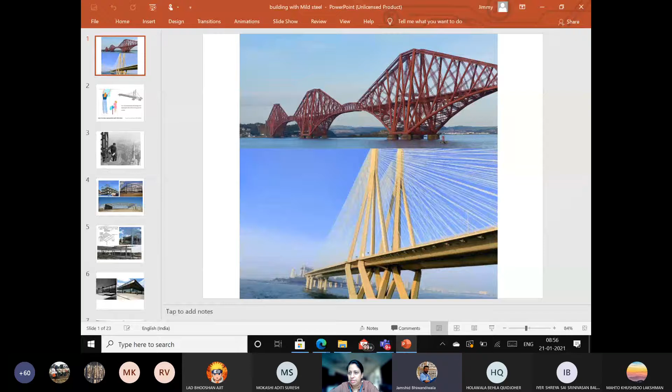Okay. So today what we're going to talk about is how, when we work with steel, we can't just deal with it like any other material. Most of the time, we think of steel as any other material like timber or concrete. We could make some of the biggest mistakes by saying that instead of concrete we could build in steel, but its implications can be very drastic. So my presentation today is on how to design appropriately with mild steel.

I'm going to start the class with these two images. The first is the Firth of Forth Bridge, and the other is our well-known Worli Sea Link. Since I don't have much time, I won't ask you what's the difference. I'll say directly that the first one uses an extensive amount of steel because it uses cross-sectional members, or rolled steel, to make girders. The system in which this bridge is made is known as the Gerber beam system. It uses a lot of steel to make various kinds of strutting girders to span these distances.

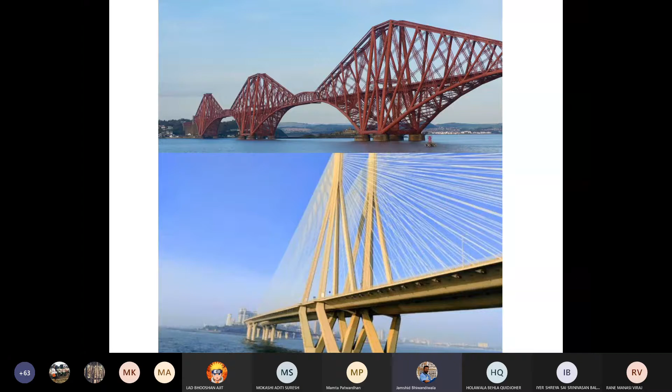But if I convert that metal rod or that support to a string, a metal string, I would use perhaps 1/10 of its material in making the string, and I would be able to dry all the clothes on it, whereby all the weight of the wet clothes could be transferred onto 1/10 of the material that is there.

So considering the property of steel, that it can be used so very well in tension, we can use minimal cross section, a minimum of its material, to achieve the maximum out of it. And because steel is measured in weight, it proves to be really economical.

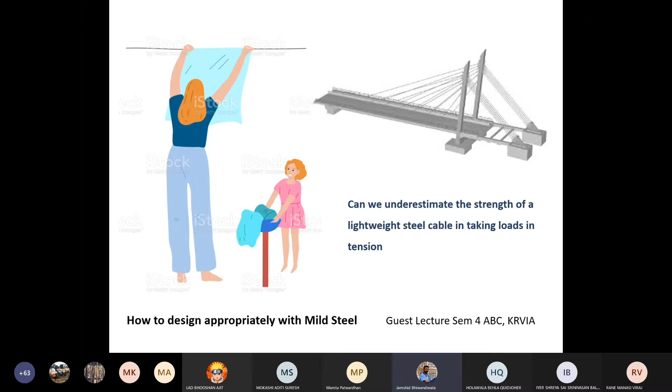So if I go a little back in history, I'll take a small overview. I know Mamta has already started with the idea of the Crystal Palace and the Industrial Revolution in some sense. But we should not forget, till very recently, we did use steel to build in compression. The day we started building higher, we knew we could not depend on masonry, and the greatest of the skyscrapers in the Americas or all over the world have been built in steel, because steel has the great property of being able to work in parts and pieces.

It's not in situ. So it becomes very easy to fabricate the parts in a plant, get them on site and bolt them at whatever height. In cold conditions like those abroad, it becomes difficult at times to pour concrete. Till very recently, the Burj Khalifa has its entire internal core and entire structural system in concrete, and that was for the first time a big breakthrough in how to use concrete for high-rise buildings. Otherwise, most high-rise buildings were built in steel.

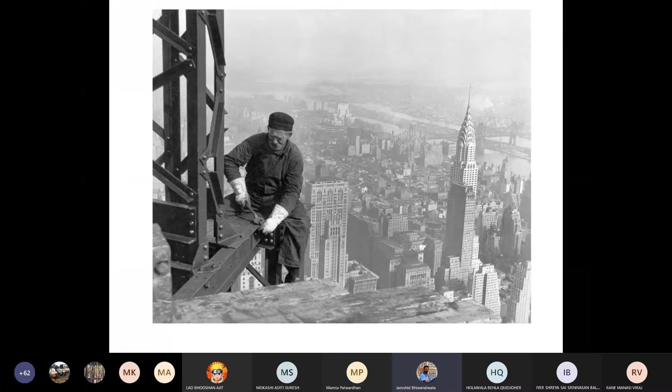And so perhaps you'd do an extension in steel because you'd want the structure to be lightweight, not because of its load, but because of its economics, because it is wise to build lightweight. And if you have to build lightweight, then it should come to you that you should use steel, because being lightweight and working with steel go hand in hand with each other.

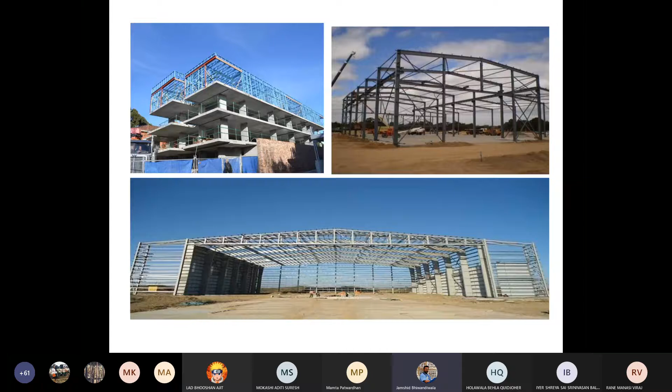As compared to the other two structures where you see industrial buildings, it is a favored material for industrial buildings, largely for large spans, because while using large spans I'd want cross sections to be minimal, either for functional purposes or to keep it lightweight. Or you could say most industrial buildings have roofing systems that are not accessed. Why would I use something heavy if I want to make a lightweight roof? In case I want to work with a lightweight roof, then I think to work with steel.

Even where I do want to work as conventional buildings, whereby I'd work with column beam structure, I'd try maximum to use minimum material. And how would I do that? I'd use what are called as open web girders.

So to the left hand corner, topmost corner, what you see is an open web, lightweight, tubular girder. And you could see that implemented to the right. Even where I am using I sections or cold or hot rolled sections for beams, you can see very clearly that I'm using what is called as a castellated member.

A castellated member is where I use a smaller member, cut these openings amongst them and join the member in order to get maximum out of a minimal member. And these castellated holes try to make the member as lightweight as possible. Don't forget, the lighter the building is, the lighter are my columns, lighter is my foundation. So it has a cascading effect on the overall material use of the building and finally the cost of the building. So if you want to build with steel, you have to build wisely.

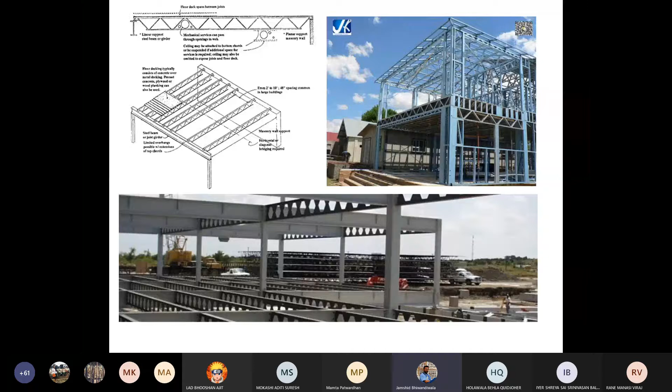Sorry, I've not labeled the PPT, but I think a recording is going to be available. So you could always refer to it.

And Mies used the idea of less is more. What better could be the concept of less is more when he used the material steel? He really understood the material in all its economics and in all its dynamics, and that's why he coined the phrase of being able to use less material to achieve maximum from it. So you could say he was the father of modernism in using steel in the most advisable manner.

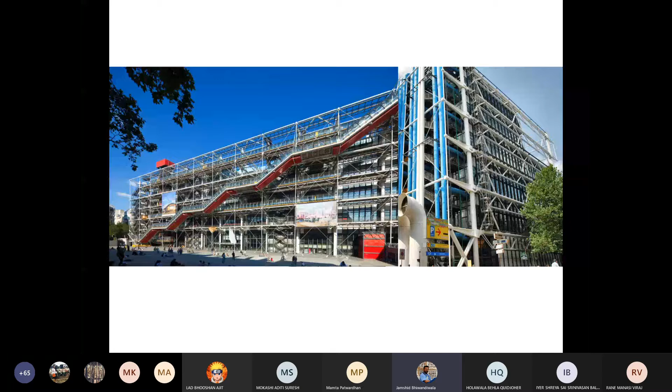And the interiors are used extensively as open exhibitions, multi-spaced open exhibitions, and that's the kind of freedom steel gives: to build lightweight, to build in a manner that can collapse, open, and all kinds of things that steel actually provides an advantage with. So another two stalwarts other than Foster, that's Renzo Piano and Richard Rogers.

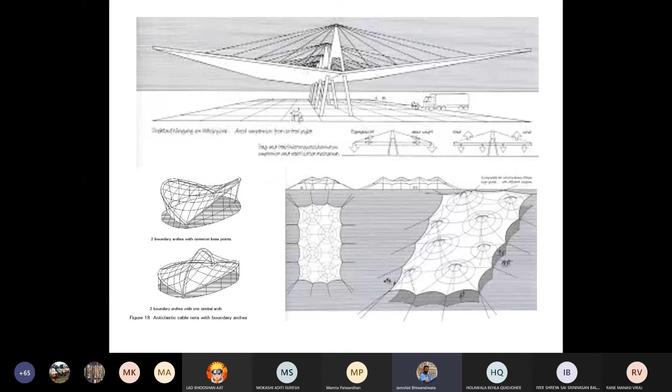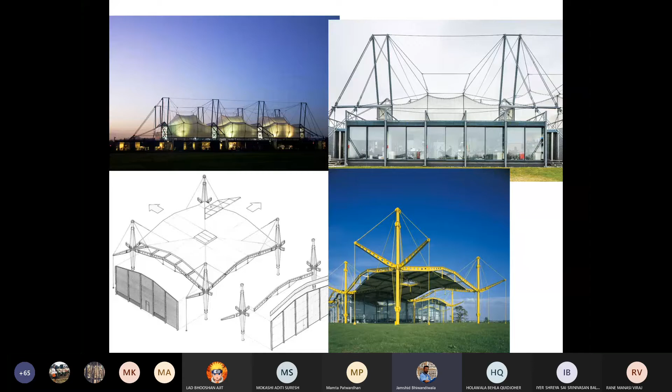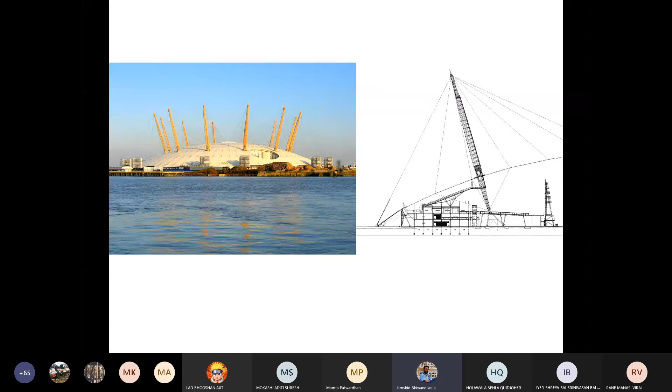So tensile members and tension members are the key to being lightweight, to be able to achieve both large spans as well as to be making logical buildings using steel. Yeah.

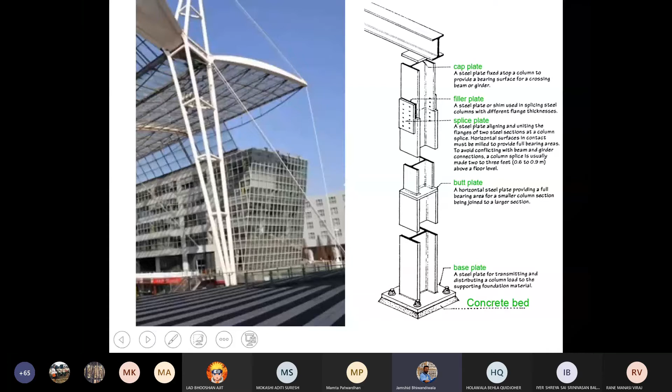So what I'm trying to say is that at all levels, not only can tension members naturally afford to be really lightweight, but also compressive members have been innovated to be used in a manner whereby you use minimal material and get maximum out of it, in order to be able to make the building lightweight and efficient.

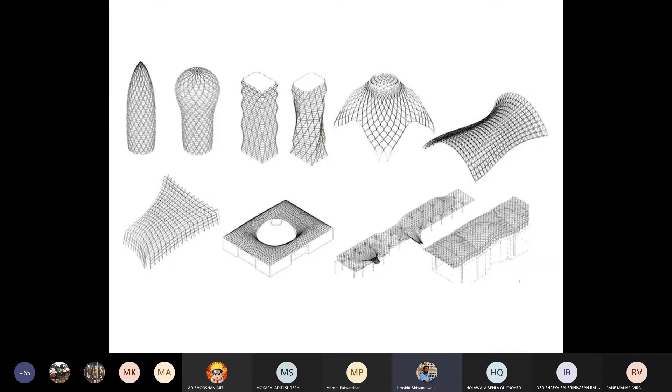Here is a compilation of some of the world's well-known parametric surfaces that architects have worked with all across the world. Most of them, the Gherkin, the British Museum at London, the Hearst Tower, show that in today's day and time, most of parametric architecture, entire surfaces, be it walling systems and entire enclosures, are worked extensively with lightweight diagrid systems. But before we get into them, we'd like to understand that entire surfaces can be achieved using these lightweight systems.

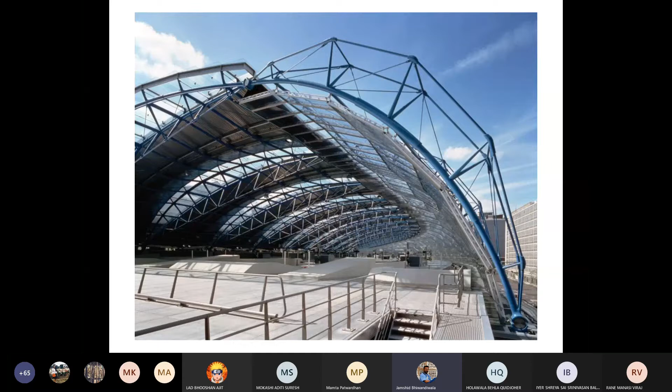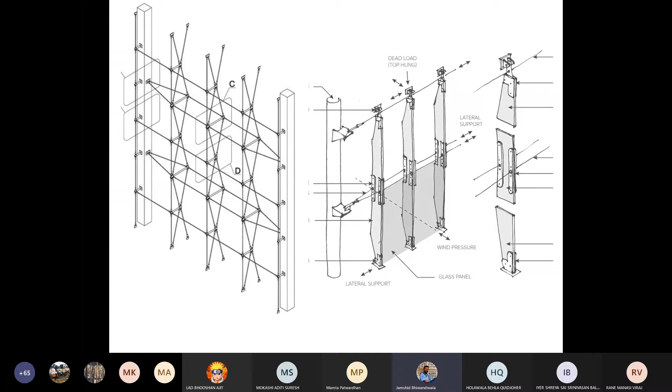And we should all understand that glass has weight. A lot of glass has a lot of weight. And so in today's day and time, we have what is very well known as suspended glazing. These are diagrams showing suspended glazing. I'm sure you've witnessed these in malls, multi-storied plazas, atriums, lobbies, where you see multi-storied levels of glass that are suspended using glass fins, metal fins, lightweight trussing, or lightweight girder systems, such that these entire glass walls are supported, whereby your facade is kept visually accessible.

What we see here is we're going a step ahead. We spoke about a number of buildings that are one or two storeys high, that are form oriented, that have lightweight roofs, and have worked well. But what happens when we intend to go high rise? Can the same principles of using steel in tension or using steel in suspension apply when we go high rise?

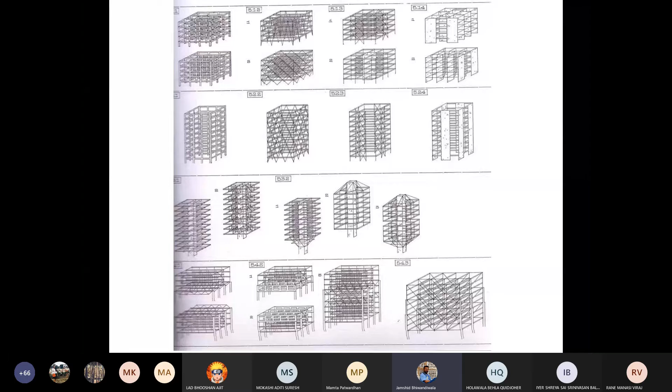I'll exemplify this particular category by talking about the renowned Hong Kong Shanghai banking headquarters in Hong Kong, which sits along the skyline of Hong Kong, designed again by Sir Norman Foster. This is the well-known hanger system. I cannot use a cursor, but from what it looks like, the building comprises of hangers. If you see along the facade, there are triangular hangers that are further held using concrete vertical columns to the left; that is very well exemplified.

So a hanger suspends as many as 5 floors. If you look at these hangers, the triangular hanger actually helps suspend from it 5 floors, and the load of those 5 floors goes to those big super columns. The super column is also a big column. It comprises of 4 columns that are well tied together, and the load transfers vertically down. But the load of the initial 5 floors goes upwards because they are suspended.

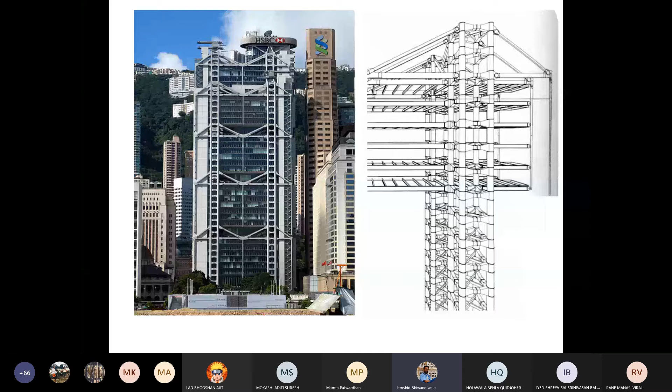I hope you've got these points. I hope I'm able to portray these points. I'm not taking questions in between. I'll take questions at the end, but I hope I've been able to convey this.

So what you see here along the atria is the four super columns to the bottom right hand side. And what you see to your left is a complete breakup of how the structural system works. If you look from below, you have your four super columns, then you have your hanger systems, and then to the left of the hanger systems you have the suspended floors that work with the hanger systems. Then the load of the glass facade, and to top it all, the services.

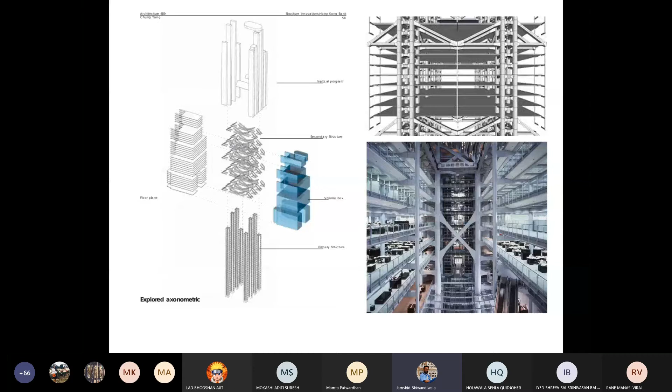So it's one of those buildings built way back in the 80s that was path breaking in using suspended members, the concept of suspension, not for lightweight ground and two-story structures, but for high rises. That's what made this building, and that's what Foster is well known for. Today we have numerous such buildings.

This is the well-known Macquarie Bank headquarters, comprising of offices that are suspended in this large atria, white boxes that are suspended. It's by, oh no, this is by Clive Wilkinson. Macquarie Bank headquarters is one of the most recent additions for the architectural world to see. Easily available; if it interests you, you should look at them. By Clive Wilkinson Architects, Macquarie headquarters, whereby suspended meeting rooms and offices work along the large atria.

Another such example is by SHL Architects, the Nykredit headquarters, again a financial institution, whereby meeting rooms and staircase blocks are entirely suspended as part of their large atria. So what you see both to the left and the right are suspended meeting rooms.

And one of my favorites is having suspended staircases. Very rarely you get to see a suspended staircase that has been designed and works so well.

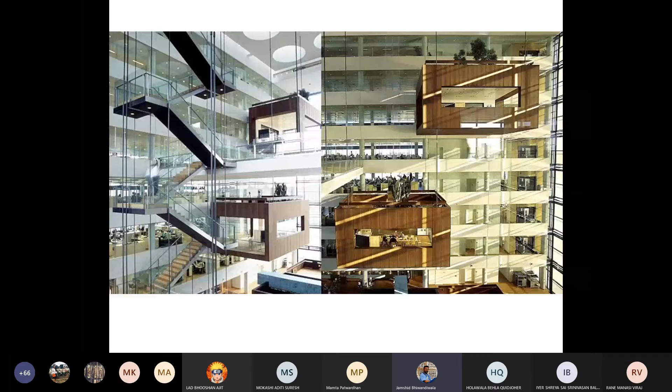The last of my slides shows we are not behind. This is Mumbai's own Hong Kong Shanghai model. This is again a building in the DY Patil campus for its management institute, designed by Foster. It works on the same principle that the Hong Kong Shanghai Tower was built on, and is presently under construction.

You see five-storied buildings being suspended from the central core. The only thing is that, considering our climate, these are not going to be wrapped in glass, but in intricate jali. Jali work creates a kind of facade that allows wind to pass through, but not the harsh sunlight. It's a building that is currently being worked upon, and its illustration is shown to the left.

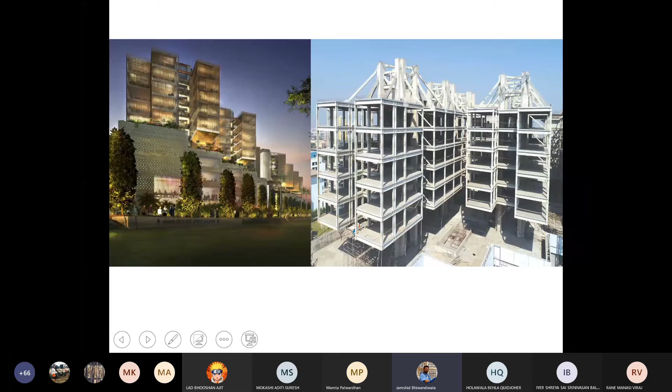With this, I'd end the presentation. I'll be more than happy to take any queries. Though I'm really running short of time, I was to run at 9:30, but I can have 10 minutes to take a couple of queries. I believe Mamta and Sirish can continue the discussion.

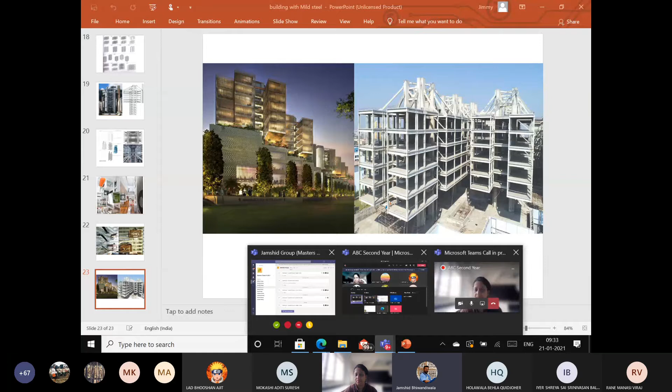They are very capable of continuing the discussion of how one should work with steel as a material, which is important in its understanding. We can't afford to look at steel in just a conventional column and beam manner. What I was trying hard to convey through the presentation is that one cannot afford to design without having the materiality of the building in mind.

We do that a lot of times with repairs. The building repairs board removes members left, right, and center from our buildings and replaces them with steel. As far as it is a couple of members, it doesn't make a huge difference. But if you start designing the way you do for concrete and assign members in steel, then God help your client and the economics that he's working with.